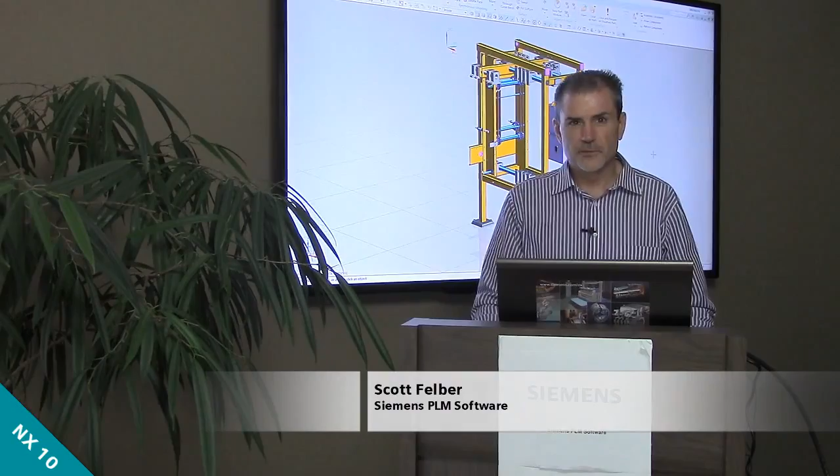What we're going to do today is design a new bracket for this part, and we're going to show you how, as a designer, there's no encumbrance to using a managed environment. So first thing we're going to do is create a brand new part.

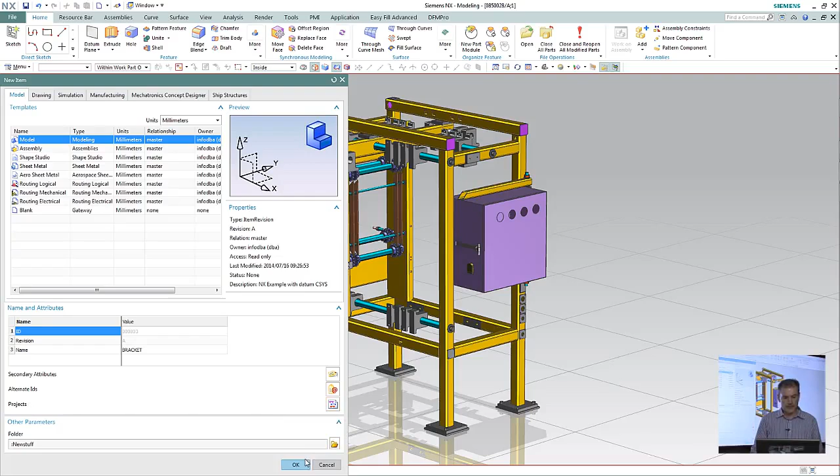When we create these new parts, we get the ability to assign the next available part number and the next available revision, just as easy as double clicking and adding them in. We can change certain things we need to do. This will be called a bracket. We could also assign it to particular projects so other people can see it and have access to it. So we'll go ahead now and create that part.

And now we'll go ahead and begin our modeling task for today to create the bracket.

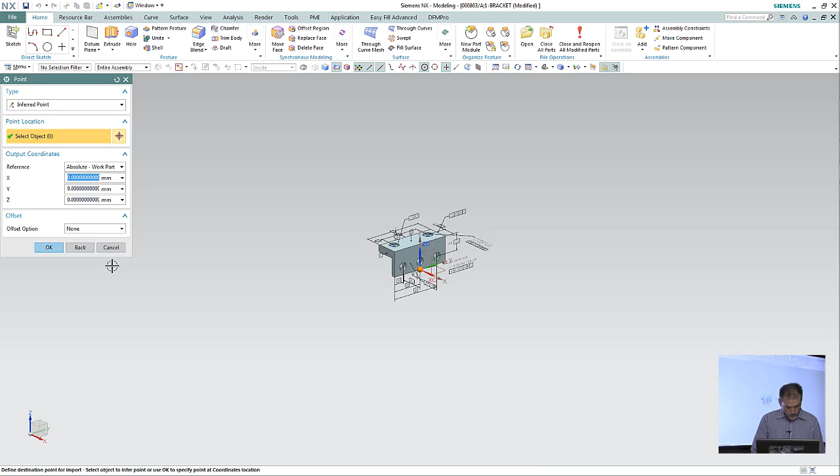As we can now see, we've completed our modeling task for today. We've modeled up our bracket and applied all of our PMI notations to it, so this PMI can now be pushed downstream to other users within the enterprise that need access to that information.

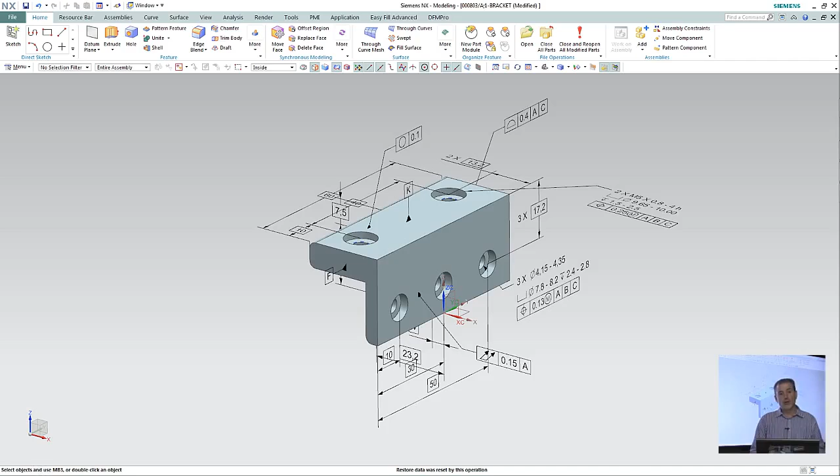In addition, I can use this PMI to quickly create the documentation and drawings I need for our parts. So I'll go ahead and create a brand new drawing of this part, which will automatically bring this PMI data and lay it onto the drawing.

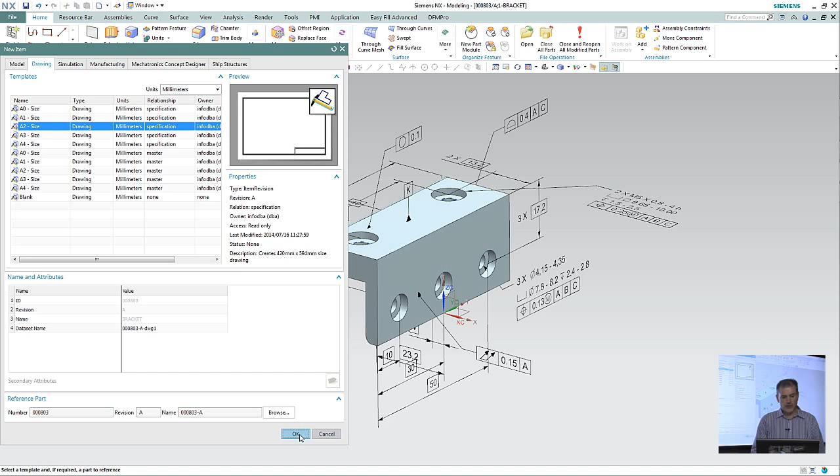Using our template-based design, we have all the drawings we need. We're going to pick just our border size. Again, we have the ability to assign different attributes to it to automatically populate items and things. So we'll go ahead now and use the drawing wizard to bring it in.

It's totally aware that it has the PMI, so it's asking what date is this issue, who drew it, who checked it. Again, title block population - we'll look now and it'll show us all the options that are available there.

What views do we want? How do we want to go about inheriting our PMI? We'll go ahead and finish that up, getting our four views out there.

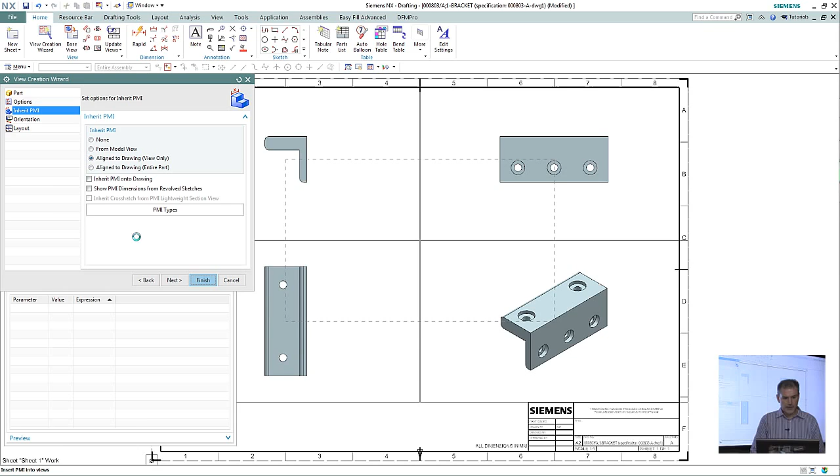As you can see now, with very minimal work, we now have the completed documented drawing that we need for our bracket. So now all we'll do is push all this information into our managed vault.

The next step we'll do, because we're the designer in charge of this part, is trigger what we'll call a workflow, or initiate a process, to get this part released into the system so everyone else can have access to it that needs it. And by doing that, we'll never leave NX.

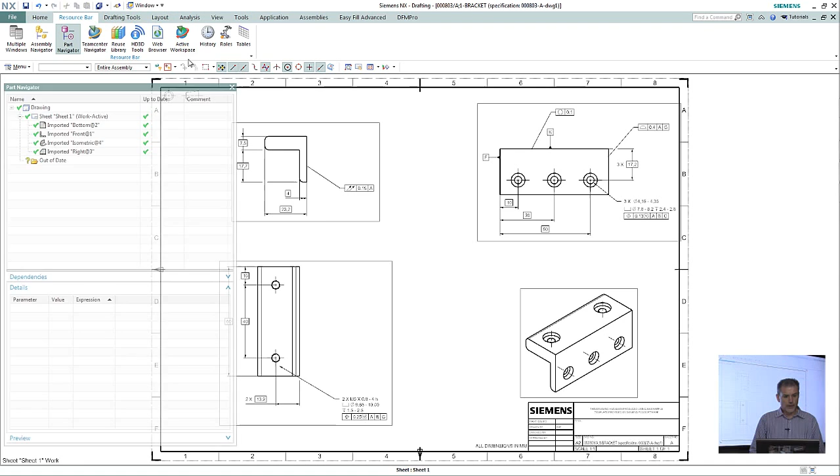We'll go right over to what we call the embedded client within NX, and we'll go ahead now and look for that part we just created, which is actually part number 803, which we'll now go ahead and look for.

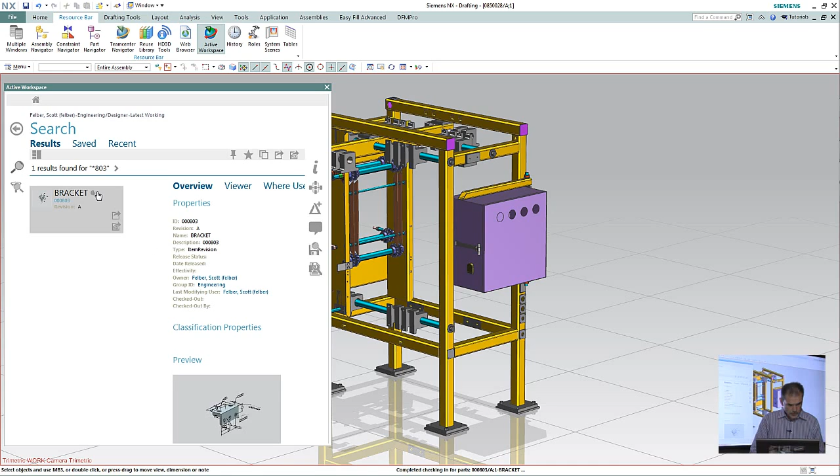Again, it brings back that one part, that bracket we just found. We'll now go take a look at what data is with that bracket. When we look now, we have no release status on it right now.

So as a designer, I can now trigger that workflow to get that part released. So what I'll do now, within the context of NX, never leaving my CAD tool, is go and submit this item to a workflow, and that workflow will then release the data.

So we're now going to release our data, go ahead and submit that to the workflow process. The appropriate people will now be notified that they need to sign off on my work and get it approved.

If I go back and look now, after everyone has submitted all their approvals, and I come back and look at that part, I can now see it has a release status of approved. So now we know that part has been approved for use downstream.

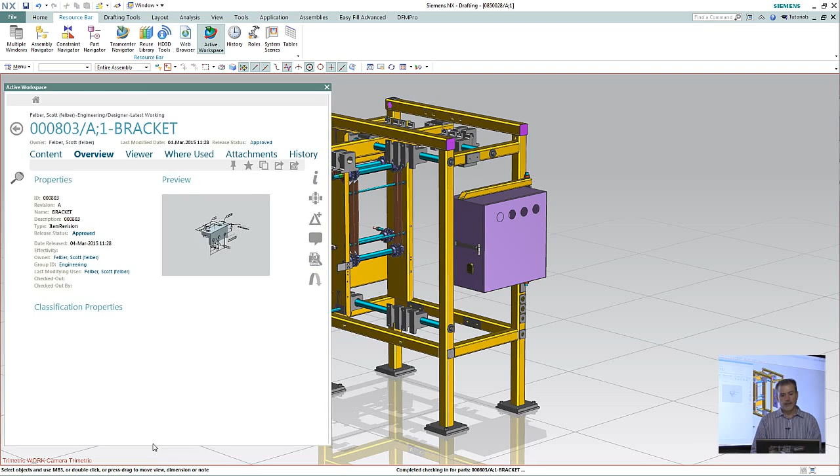In addition to working in NX, the beauty of a managed environment is now I can take the data I have and push it out to the rest of the enterprise for everyone else to look at. So for instance, let's say we're on the manufacturing floor, and the manufacturing people need the information included on that part to be able to make that part, machine that part, or other things they need to do.

So now what we can do is push that data out to the rest of the enterprise so everyone else can see that part, use that part, and get information from that part. Again, this is not within the context of NX - this is the Zero Client Install Active Workspace part of Teamcenter.

What we're going to do is go ahead now and look for that part again. We know it's 803. We were told we need to do work on part number 803, so I'll go ahead and find that part.

When I see it, here it is - I can see a little preview of it. But in addition, if I'm on the shop floor and I have web access, I can now go look at that part in the viewer.

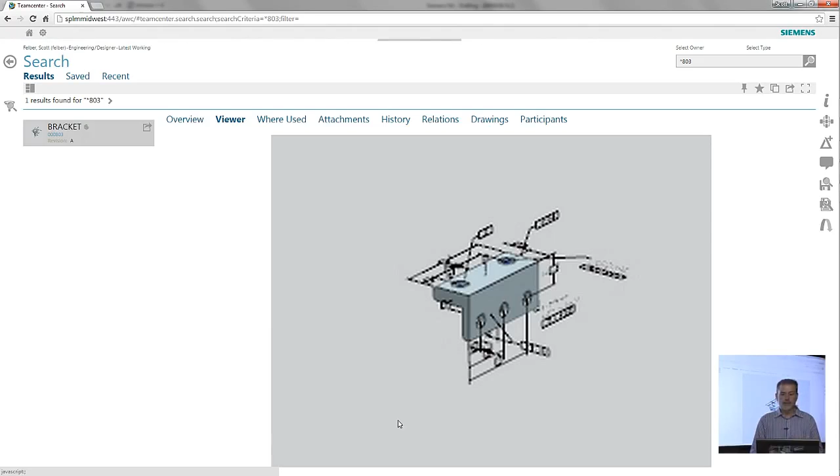So now, as a designer, I don't need to have people coming to my desk all day asking me to look up information for them. The information is available to them at their fingertips.

So once this part comes up in the viewer, I can rotate it around - it's a nice 3D image of it. I can take measurements from it, and other things I can do.

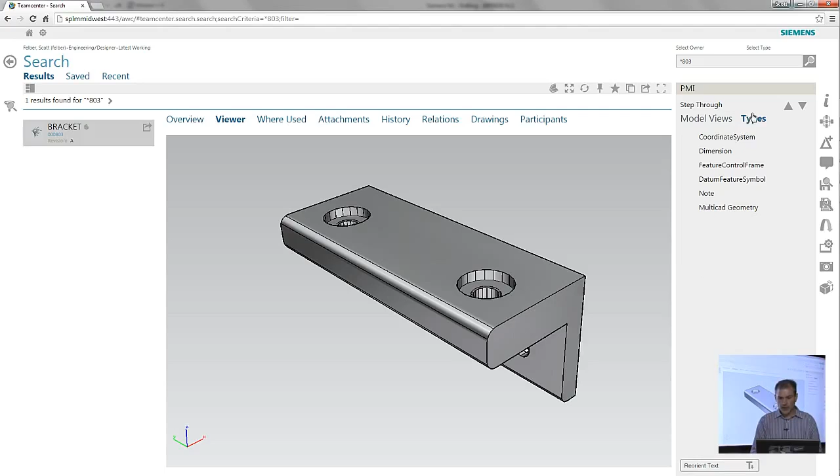The one thing I want to do is go look at all the PMI that was included on it, because that's really where all the information is of how I make this part, how I check this part, and other things I can do. So let's go ahead now and look at some of the PMI that's on this part.

So now when I look at the part, I can now see certain things. So as people outside of engineering need access to information, they are now enabled to get that access.

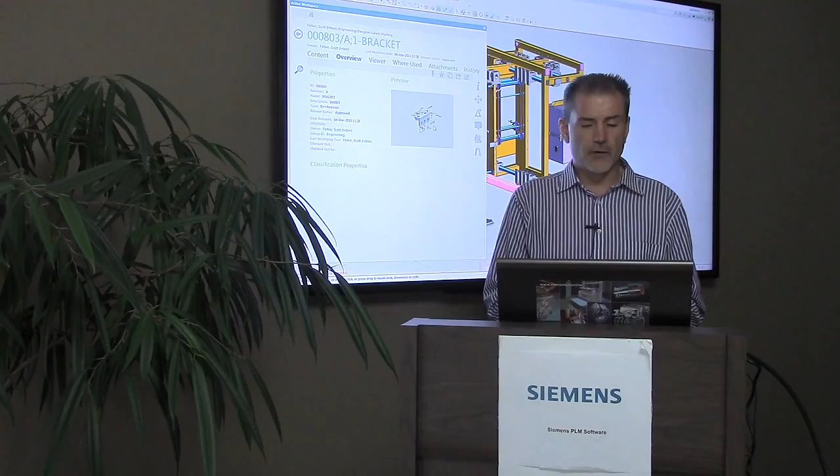So now that we've done all the management of the data and pushed it out to the enterprise, it really is of no burden to anyone to do this work on a day-to-day basis, and that's today's NX Quick Tip.